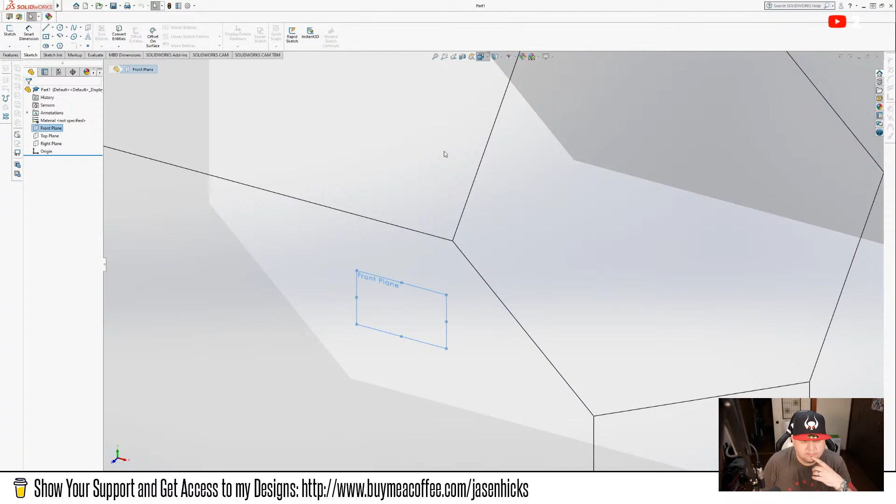All right, just like usual, we're gonna do this in not Photoshop. I have that open. I'm sorry, SolidWorks. So let's go ahead and click this front plane here, make that our normal here, and click Sketch.

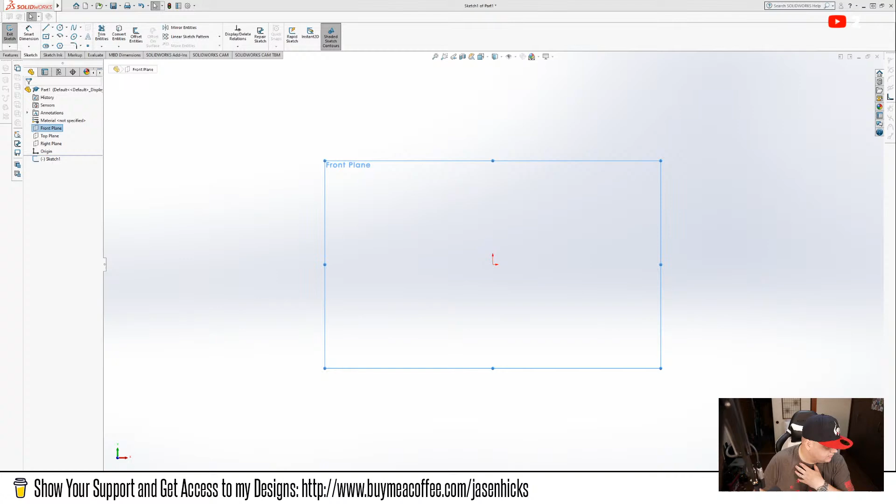Now, here's the thing. When I made the original Pro Cable, I modeled it right after the Neutrik NAUSB-W. Why? Because it's a D-size connector, which is standard, and it made sure I didn't have to get custom rubber gaskets or anything like that made. So we're doing the same thing again today. What I've got over here on the side is Neutrik's engineering drawing, and we're going to use that because it gives us outer dimensions and stuff like that, so we're good to go.

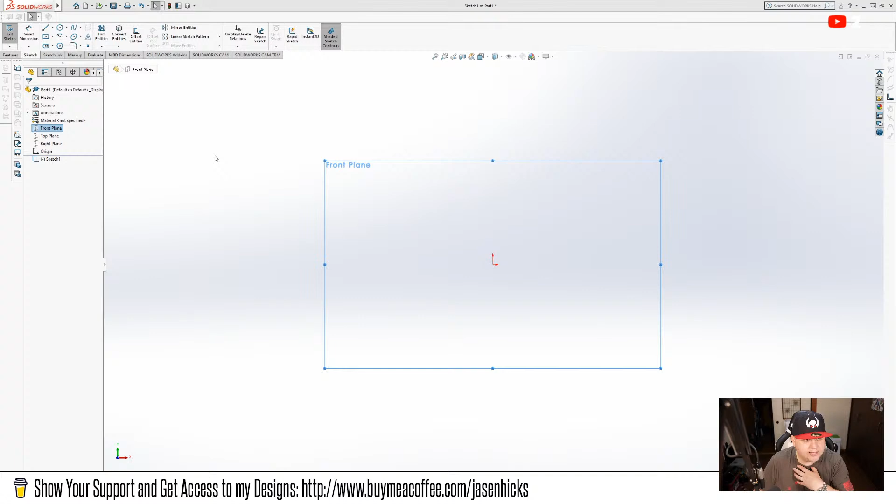Nothing creative or magical here, and maybe when I'm done I'll just release these files for free, why not? So first we're going to draw this rectangle like that, because that's the shape of these things.

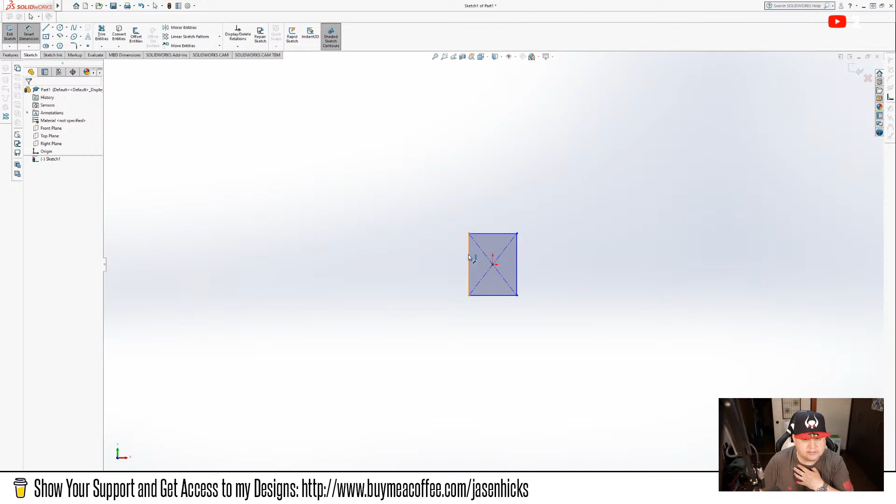Let's undo that. Now we look at our mechanical drawing over here, and it's 31 millimeters tall, so let's click this and go here. Boom, just like that, I got pretty close. Make that 31, hit enter. And I'm going to click this one, and we know from the engineering drawing it's 26. So I click that, boom, done, 26 millimeters.

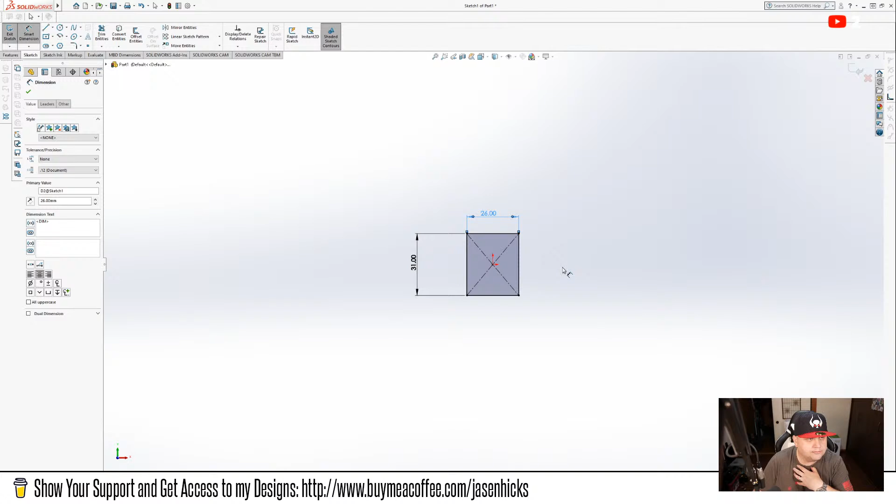We're 30 seconds in, and we already have the basic outline and shape. Next we're going to zoom in, undo these smart dimensions, and make some circles. We don't really care where we're placing these yet. We need two of them, one in the upper left, one in the lower right, where the screws go through and mount into the case. So let's do a smart dimension here, and based on the drawing, we know these are 24 millimeters apart, so that's 12 millimeters off center. Same thing for this one here.

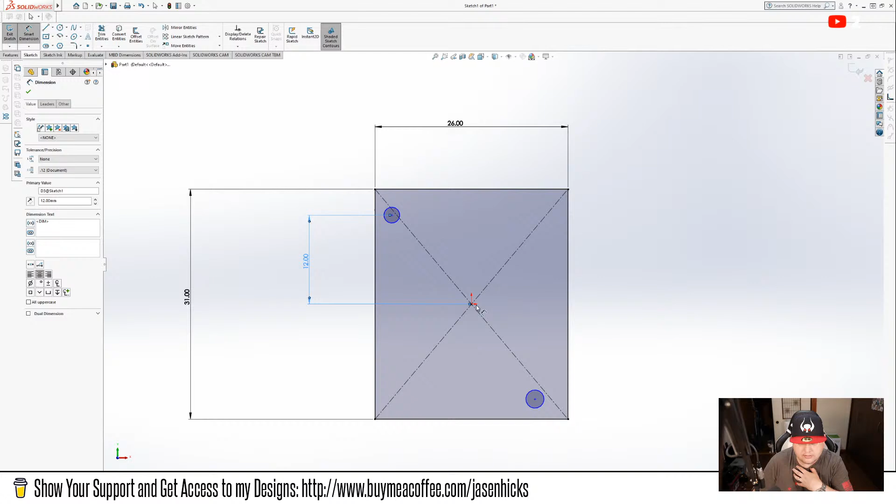You'll notice I'm referencing everything off the center point because that's what we want. Looking at the other side, we know these are 19 millimeters apart, so we click in the middle again, click here with our smart dimension, and instead of doing math with a calculator, we do 19 divided by 2, which makes it 9.5 automatically. Very simple. We do the same for this one, and just like that, we now have the right basic shape we need. Pretty simple so far.

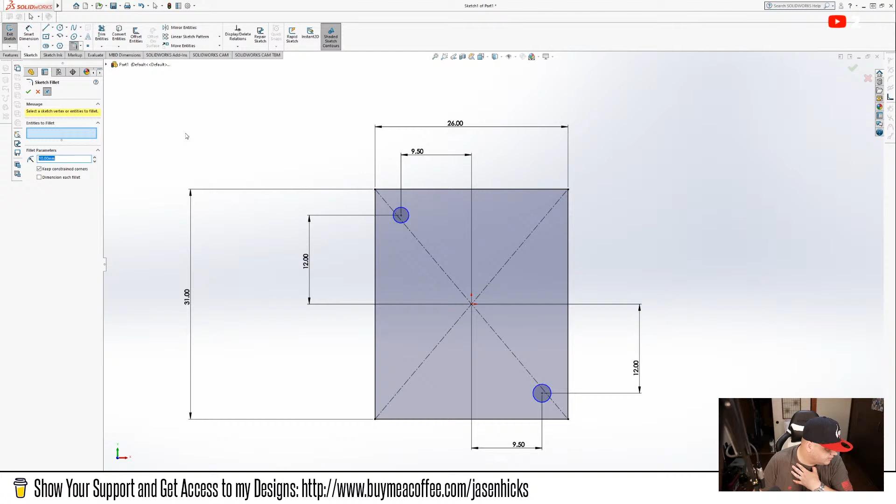Let's click on this fillet tool here. The engineering drawing doesn't say how big the fillets are, but you can deduce that if it's 26 wide and 19 in the middle part, subtract them, that gives you 7. So I think these are about 3.5 mil roundovers. We put that in the fillet parameters and click that. But that's too big, so we probably want 3.5 divided by 2. Let's hit enter. There we go, that looks a lot better.

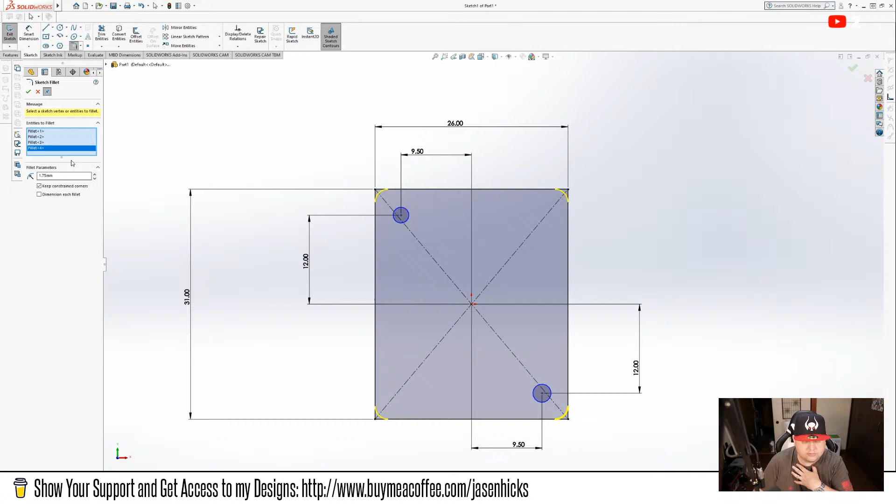Just like that, boom. Look familiar yet? Looks pretty good to me. All right, so that's the basic shape.

Now the next shape we need, let me switch to my full face cam here so you guys can see this. Look at this, yeah, I still have a lot of these. This is going to be the part we're putting in the middle here.

This is the Pro Cable connector, and the reason I designed mine originally with 2 plates was because I had the cables manufactured from one place, and it was much faster if they soldered everything for me instead of me doing it, since that would take a long time and they're experts while I'm a mediocre solder person. So we did the 2 plates and just slid the cable in and kind of sandwiched them together. It worked real well, no major complaints, but we're going to make it a little better, a single piece, and make it a DIY friendly thing, because you actually want to install this connector and the wires through the plate to mount it properly.

Especially since we're going to make these out of anodized aluminum, because no one wants to put plastic in their fight sticks, we need to see if we can find an engineering drawing for this, or we can just use some calipers. Either way, both are good.

Let's go back to the main display. You don't want to see my face that big. We want to go back to the engineering drawings and find those. Let's see.

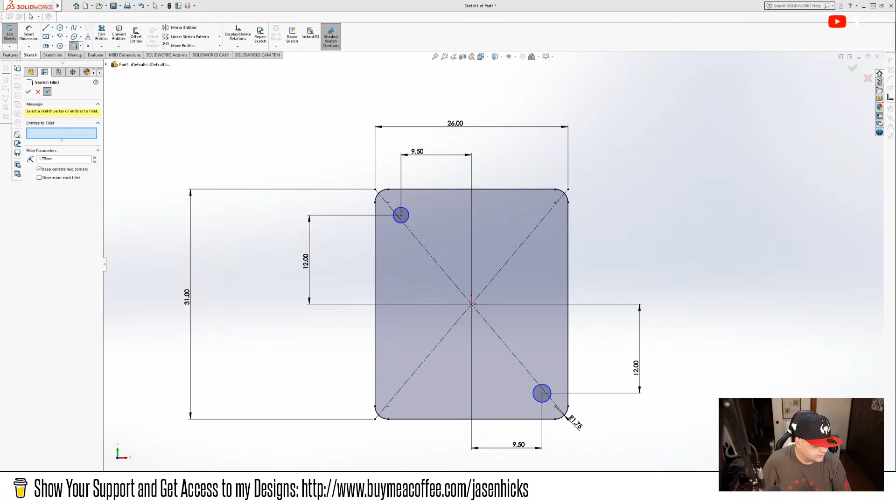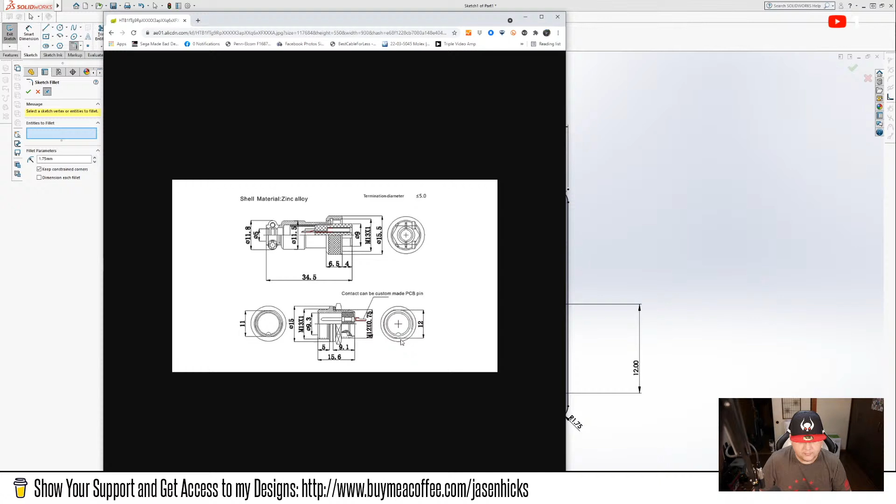Here we go, let me copy this, paste this here, and just like that you guys can see this is the engineering drawing for the connector. On this side it's 12 mil, it looks like, and then it's got an M12 by 0.75 thread, which checks on this side. And it looks like it's got 11 mils on the flats. We'll double check all that.

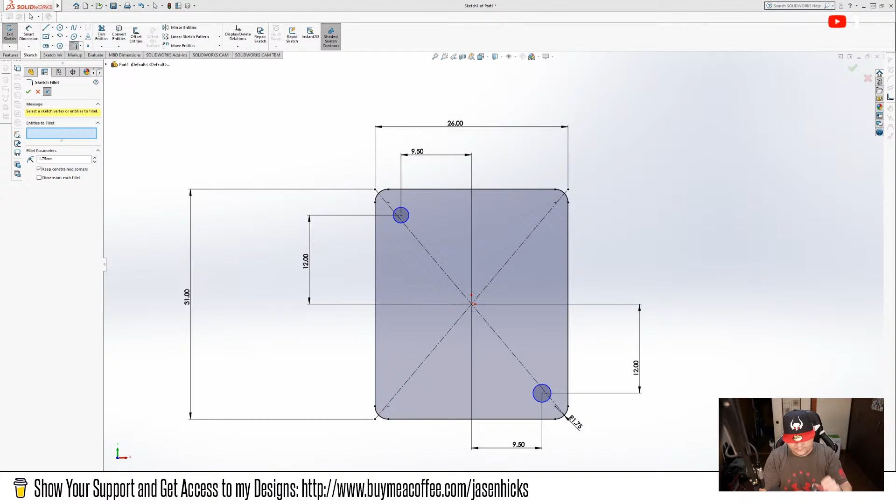All right, back to work. I'm gonna go ahead and use my calipers. It's very important to put them like this, turn them on, and then hit the zero button so you start at zero. Very important. First thing we're gonna do is check the circle, because that's the important one here.

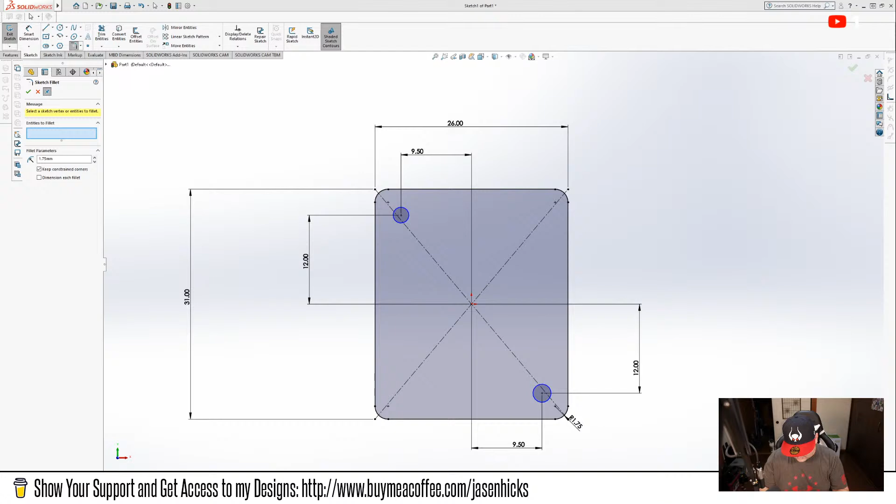I'm gonna do this, make sure it's on the flats, or not the flats rather. And yeah, look, just like I kind of thought, it's about 11.7 mil. So if I make that a little bit bigger to 12, it fits in nicely. So we're gonna make a 12 mil hole right in the middle, and then we're basically done.

Now we want to measure the flats, because if we make some flats in here, then this thing won't rotate. That'll make it easier to tighten everything down. So let's go ahead and zero this out again, and then locate the flats on the threads.

Okay, measure that out, and it's like 11 mil. Good. So, cool. What we're gonna do is go ahead and exit out of this.

Then I'm gonna click this little square guy, and go like this. And I'm gonna take my smart dimension from the middle up to here. Oops, I'm not gonna do that. That didn't work. All right, let me delete this, let me just delete all this.

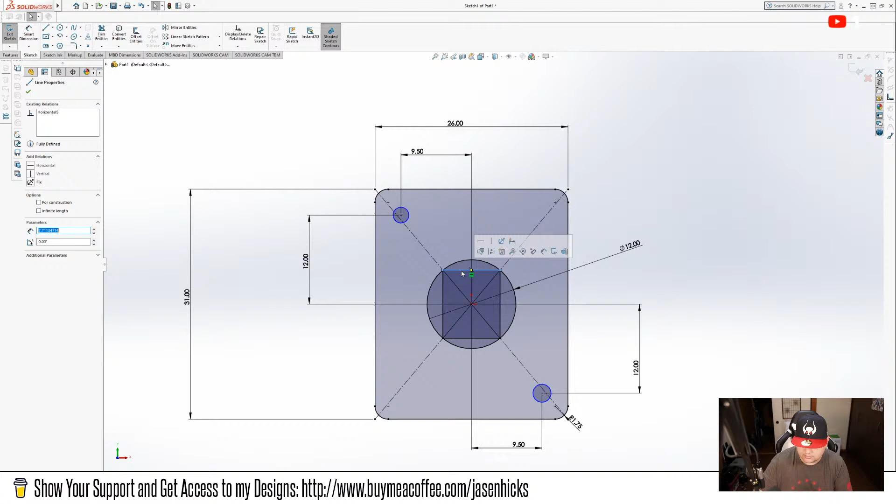All right, so we'll do something a little bit different then. We're gonna go horizontal and midpoint, and I'm gonna just click this and go like this. Doesn't matter, do another one up, whoops, like that, and I'll do another one. Do a midpoint line, we're gonna do it horizontal. We're gonna come up here and just draw it out like that.

Good, hit OK. Now I'm gonna take my smart dimension, go from the middle, click here. I'm gonna do 11 divided by 2, 5.5 makes sense. Do the same thing down here.

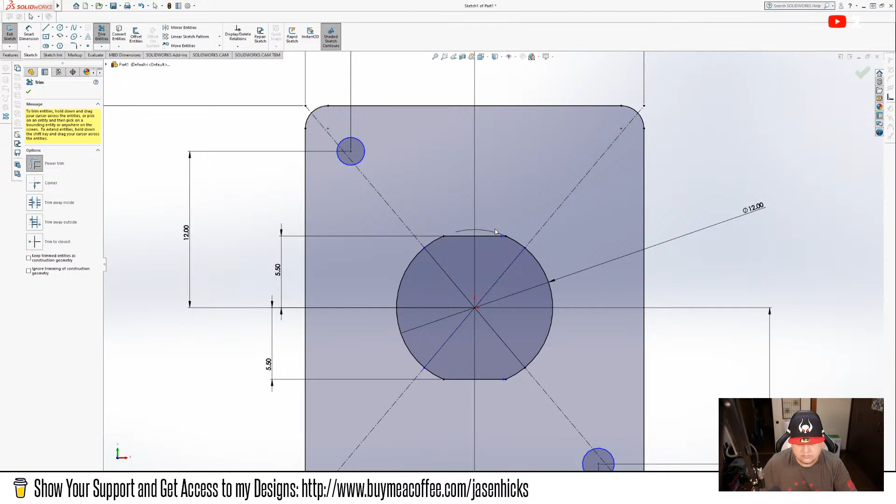All right, now what I can do, this is a real fun trick, is exit out of here. I'm gonna go to my trim entities, I'm gonna do power trim. I'm gonna get rid of this, and this, and this one, get rid of that one, get rid of that one, that, and that. Cool, hit OK.

And exit the sketch. Look at that. Now we have a Pro Cable connector that will lock this in and keep everything nice and tight, if you will, which is exactly what we want.

So let's just go back in and double check a couple things just to make sure we're good here. So we got 5.5 plus 5.5, that's 11. That's going to be the flats, and we're going to double check that again just one more time. Measure twice, cut once, right? Yep, 11, good. And then the overall circle's 12.

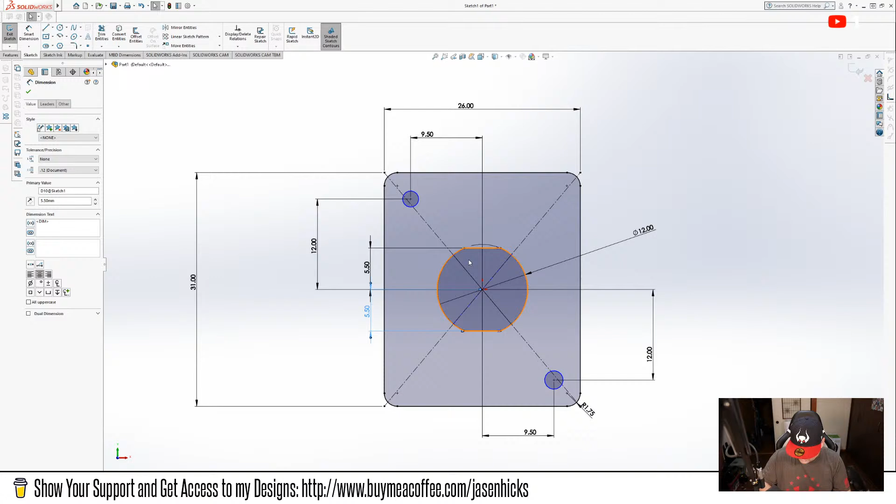Let's just double check the threads. Should be pretty straightforward. 11.8, 11.9, yep, 12, good. There you go. Hit OK, and that's our plate. Let's exit out of this.

Now what I'm going to do is click here. I'm going to just rename this. I'm going to call this Pro Cable case side. And then I'm going to come up here to my features.

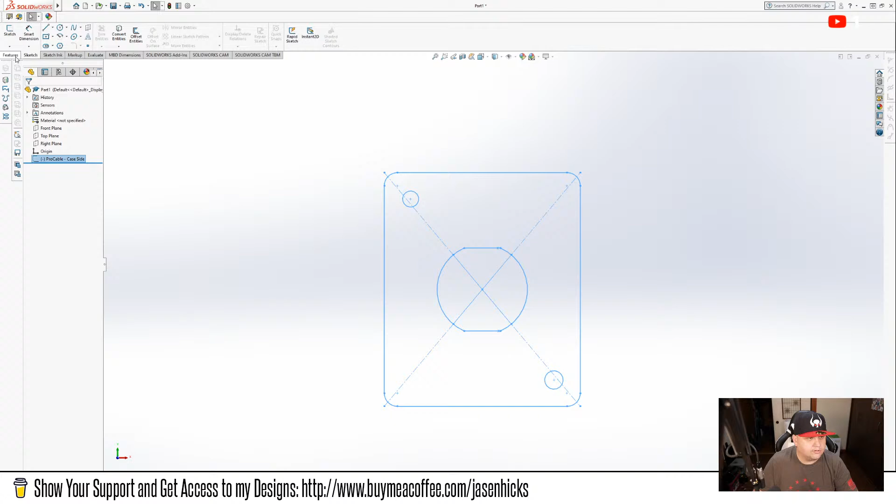I'm going to extrude it. And let's double check our USB, our metric one, and we know that it is 2 millimeters. So let's just take this and go 2. Boom, just like that. Hit OK.

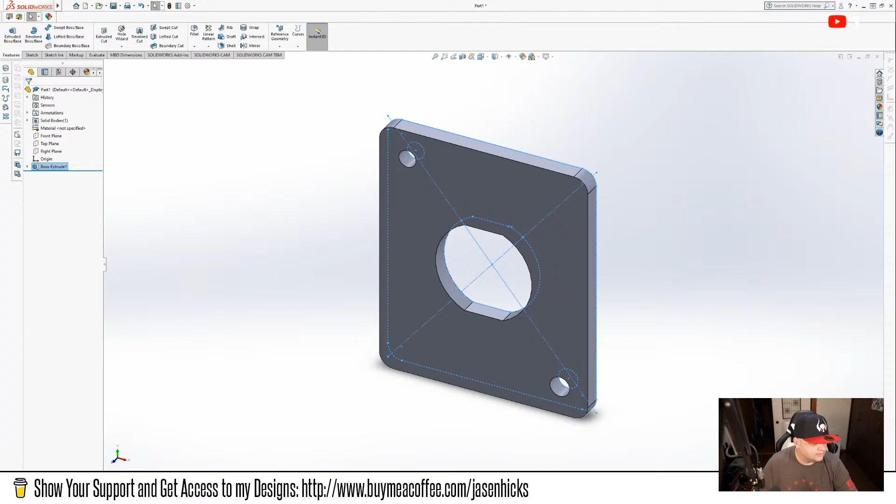Voila, look at that, now we have some depth. Let's click here, click on this guy. Now I'm going to come up to my hole feature and go to advanced hole.

I'm going to change my screw type down to a countersink, and then I'm going to make these for #4 screws.

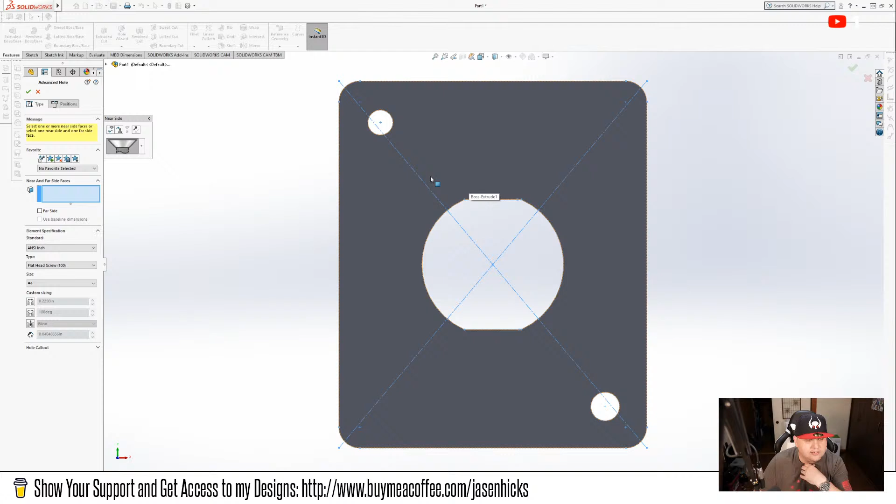I don't know what hitboxes Ryan uses. I think probably similar, I've used these on the Panzer since 2017. When I closed up shop, I sent all my stock over to Spencer and he sold out. I wasn't sure if we needed to make more, but apparently we did because other people started making them, so I'm going to release the design for free. You can get them made, or maybe I'll get some made and have Spencer sell them again. We'll see.

Okay, so over here I clicked on this countersink thing. It's ANSI inch, we're going to just go with 4-40 screws, that's what we used before. It's a flathead screw, we'll do the 100 degree, that's fine. It's going to be a little bit loose, which is good, and number 4 is there so we should be good to go.

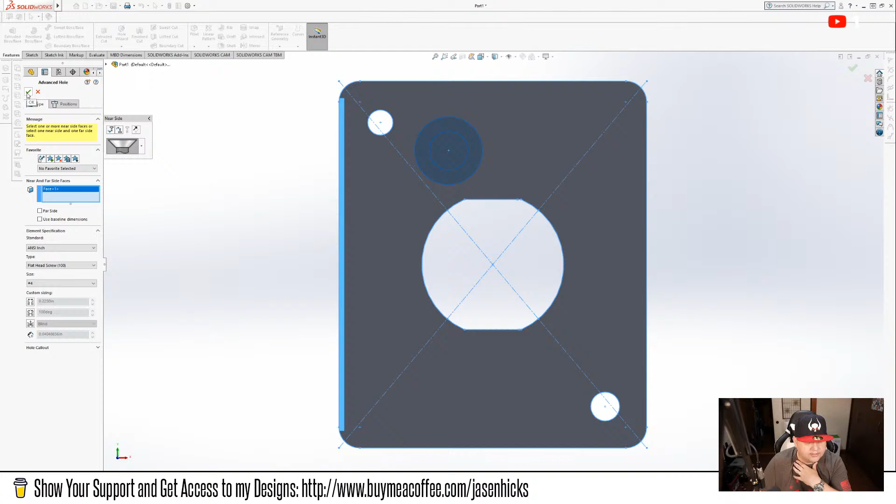Then what we're going to do is click here, so that gives me a face. This is the trick that I know, it's weird, I'm going to hit OK. It's going to say you got to put a hole somewhere, so I'm going to find the center and just click there, then do the same here, and hit OK. Voila, look at that, looks pretty good to me.

There you go, there's a pro cable connector. All we got to do is machine it out of aluminum and you're good to go, right? Let's see what else we should do on this.

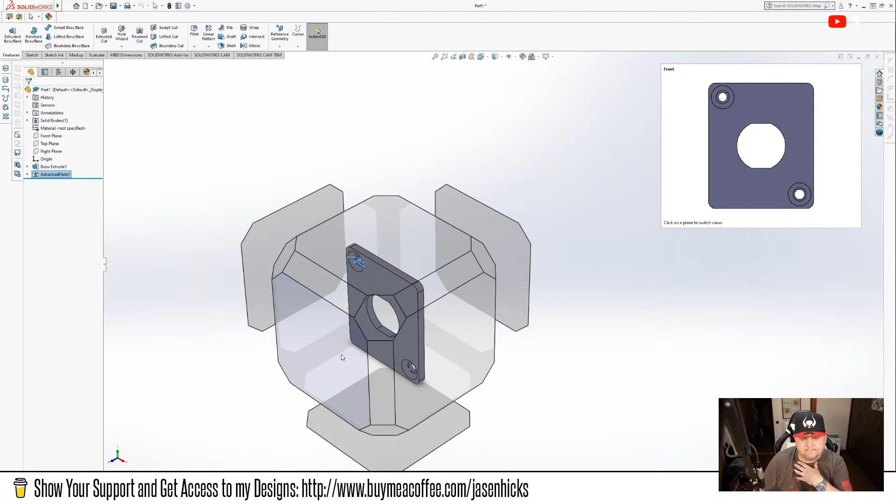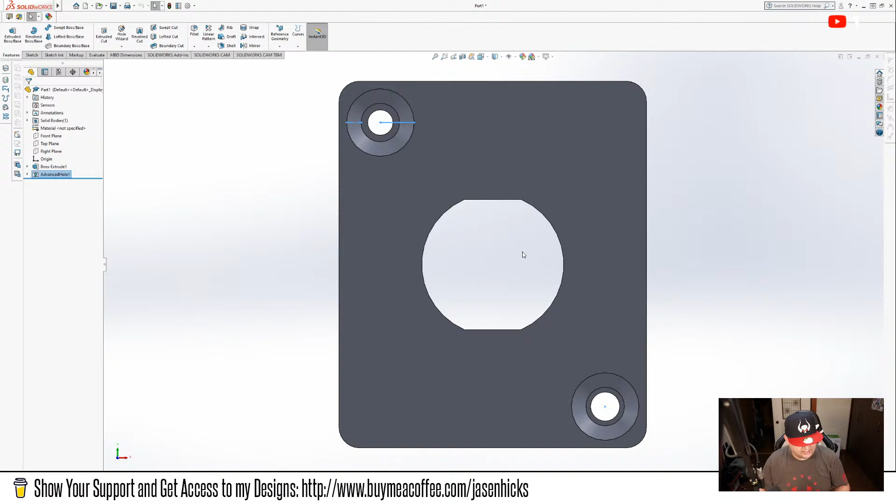Do we want to put a little fancy fillet on it? No, that's dumb, we'll just let this sit proud, I guess. Why not? Let me just quick measure - on the sides we've got 8 millimeters on 8 millimeters right here, so we got plenty of room for the screw and washer to come up and lock into place. Why would we want to constrict it any more than we have to? That's silly.

So just like that, we have this done. It's pretty straightforward, and I hope you guys enjoyed that.

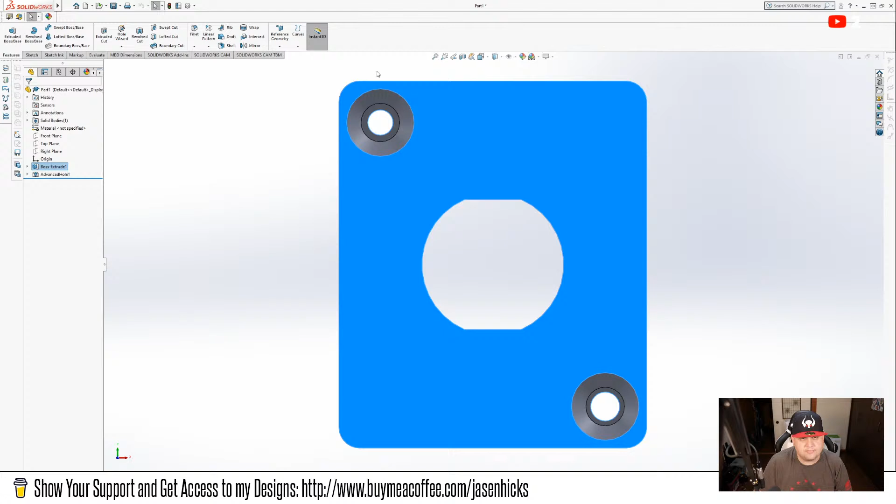Let's see what else we want to do. We can right click on this, let's have some fun with SolidWorks configurations. We're going to configure this - apparently I can't configure it because I've got a broken install. Let's see, properties, how do I set the material again? Oh, body properties, maybe that's it. No, it doesn't matter, these things are going to weigh like nothing anyways, so having SolidWorks calculate out the weight seems silly to me.

Okay, so we've got that all done. Countersunk screws, real good, we could send this off to machining right away and be good to go. So let's go ahead and save this.

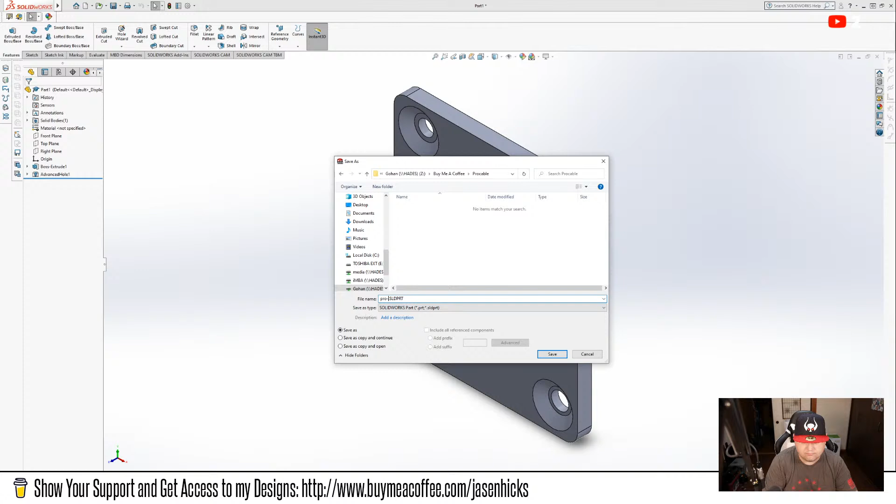Just like that, we're done, so I'm going to go ahead and call this stream good. It was nice and short today, huh? Like 15 minutes, super easy.

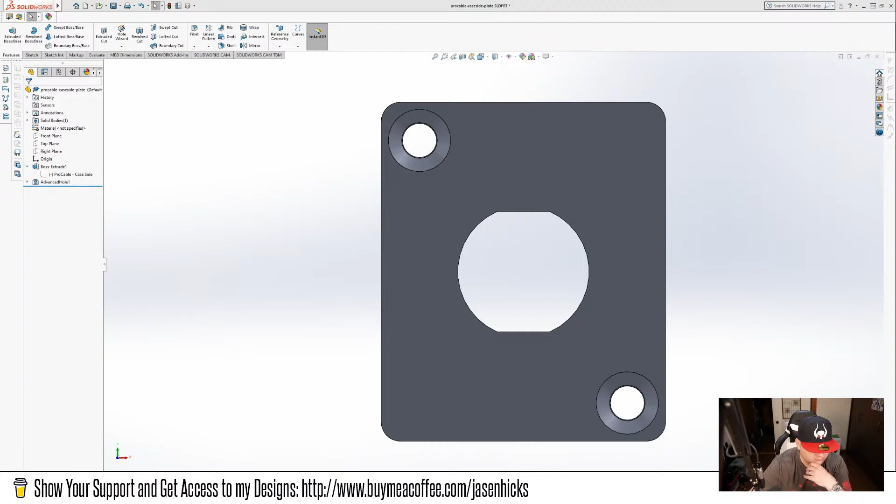Real quick, post-stream correction - I didn't set the circles to the correct sizes here, so I went back and did that in my sketch. You can see I set it to 3.1. So there you guys go, sorry, now we're done.